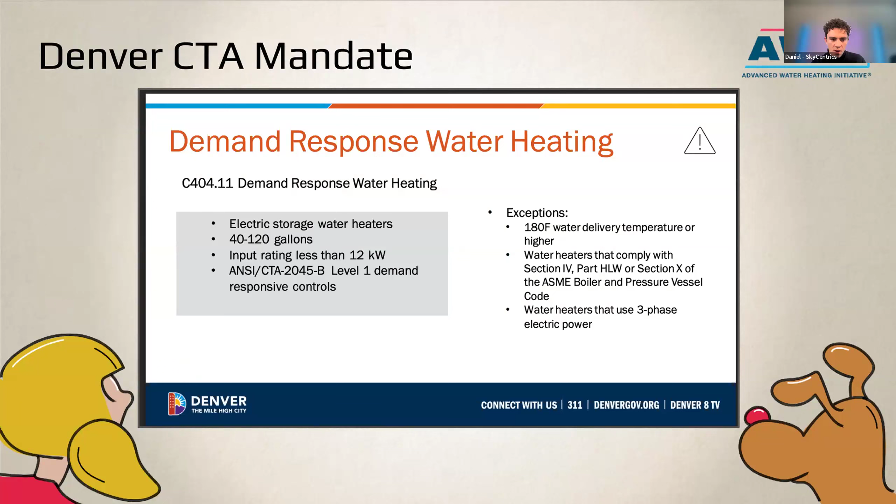California has Title 24 JA13. It's a little more complicated, and it does require the EcoPort socket, but not on every water heater sold in California. And then Colorado, the city of Denver, has started something. We have it in detail on this slide — if you are putting in water heating, I believe it's multifamily, it doesn't say multifamily here, so it says electric storage water heaters must be CTA 2045. Daniel, do you know if that was the whole any water heater in Denver or just sort of multifamily, or you're not sure? Unsure. Okay, great.

So why is the EcoPort CTA 2045 open socket so worthwhile? A couple of quick points: vendor neutrality avoids walled garden and vendor lock-in. The most important thing is that for stranded assets, for all of you who are utilities, it's going to be the least expensive way that if your vendor ever goes out of business with that white module that plugs into the water heater, you can just mail everybody a new module. We've seen even big companies like Google end-of-life certain products that just become bricks in the Internet of Things world. So I think that's one of the big reasons that the EcoPort socket has value.

We call it sort of competitive vendor access. And then also at the bottom, you see better optional connectivity paths. Most OEMs at best are going to put maybe Wi-Fi inside it on the residential side. On commercial, it gets a little more complicated, but having that socket, kind of a USB port for machines, allows utilities to say, 'I'd prefer cellular,' for example, which has shown itself to be a little bit more long-term connectivity guaranteed than Wi-Fi, because people change their passwords, change their router, change their provider, etc.

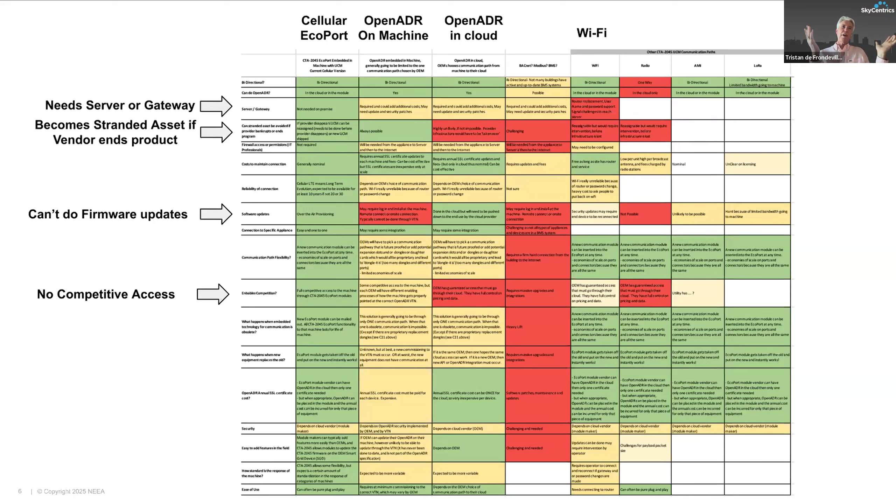With OpenADR in the cloud, the OEM — like some water heater manufacturers have an OpenADR cloud — they can still send firmware updates, but only however they chose to communicate between their water heater and their cloud. And if you have OpenADR in the cloud, it becomes a stranded asset. So the nice thing about a cellular EcoPort module is it's always there, and it could actually be redirected to a new vendor if the original vendor goes out of business — you don't even have to mail a new module.

I think you might have frozen up there, Tristan. Daniel, are you able to hear Tristan, or is he frozen up on your end too? Looks like he's frozen up on my end. Let's see if I'm able to take control of the presentation real quick.

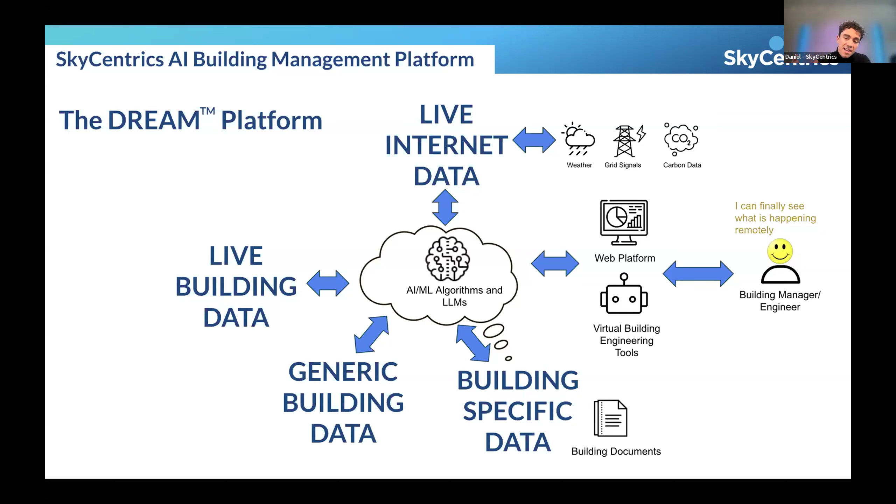And then you've got your live internet data, so that's what's going on outside the building. That could be weather, grid signals, or carbon data. It basically aggregates all of that using machine learning algorithms and provides it on the Dream web platform that the building manager, engineer, owner, or anyone else can access and see all in one place.

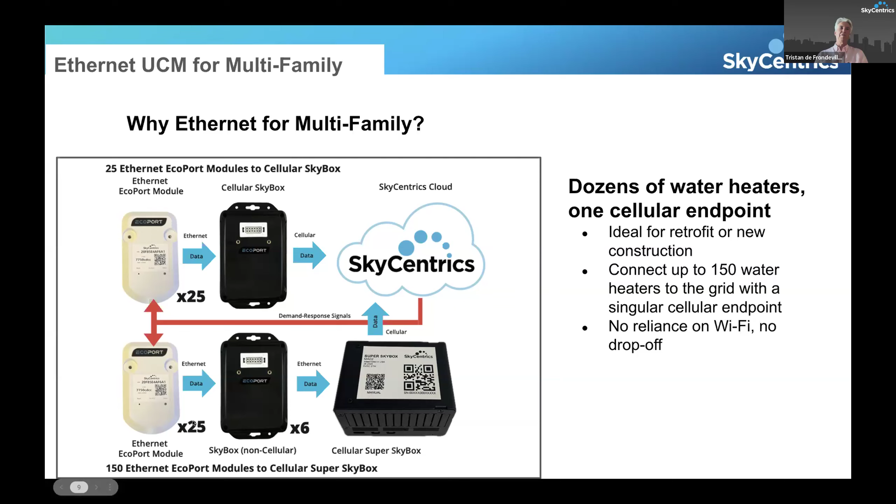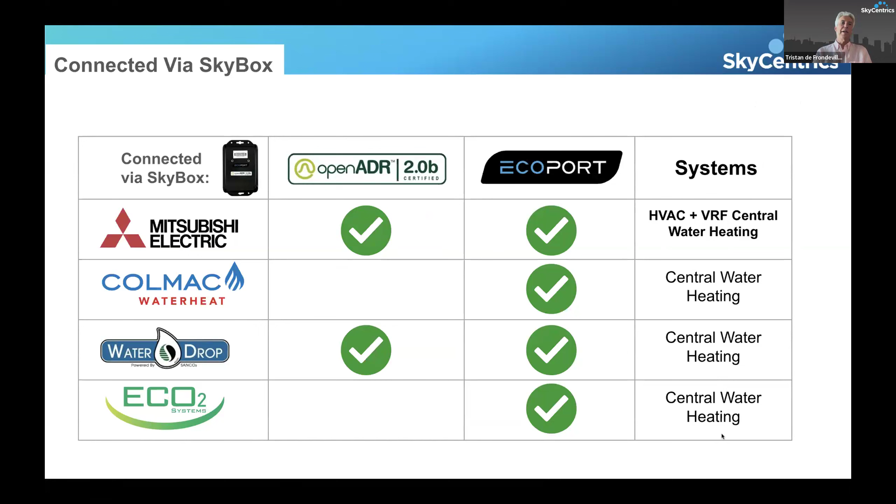So these are the people whose central system water heating are now EcoPort compliant and even OpenADR compliant. Mitsubishi has presented on a number of things about their QAHV central system water heating, which is exciting. You may have heard of the Bayview apartment buildings, but their VRF HVAC systems are also now going to be able to be grid enabled. So that's very exciting.

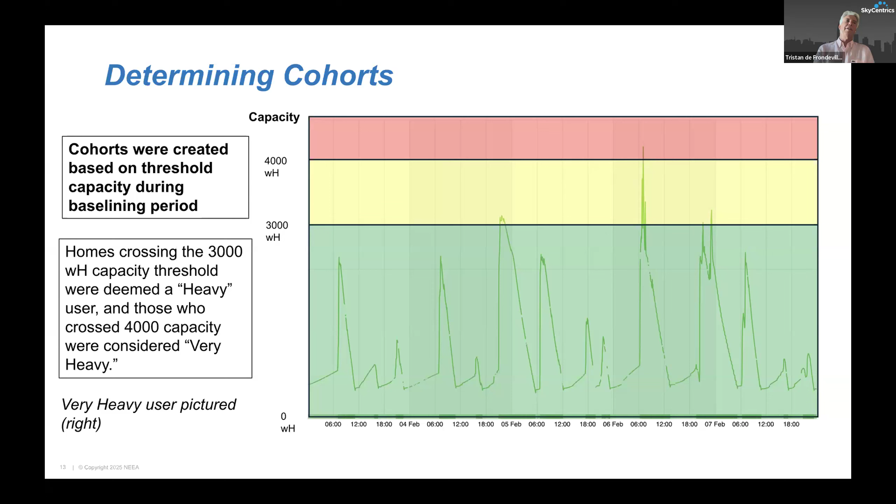So we determined that in, let's say, 100 water heaters, about 76% never get close to being a cold water event during their normal use. There are heavy users that get close a little bit sometimes, and then there are very heavy users that we have to be very careful with.

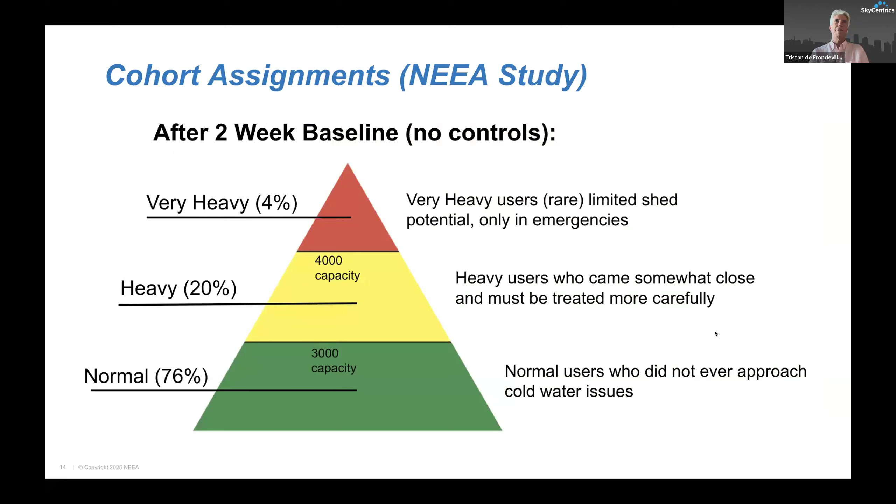So we already split those up into groups. Next. All right. So right now you can see the whole cohort being done. Sorry, next slide. But I think I got the idea across, and we're going to be a little bit late.

So one of the things that we can do besides sorting by hot water usage is time of day use. Geography: there's actually geolocation through cellular, and potentially you can put a chip right on it, obviously, that gets you 3 feet accuracy or 3 meters, but the cellular towers actually get you within a mile, so at least you know typically what territory it's in.

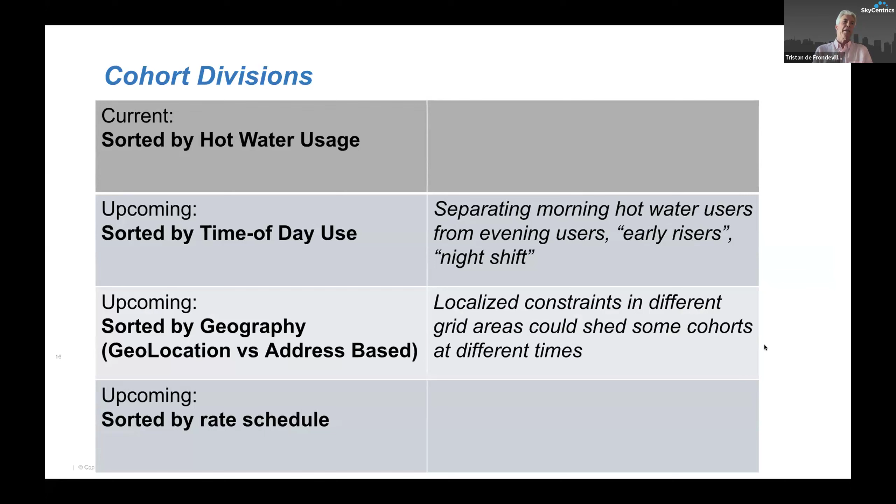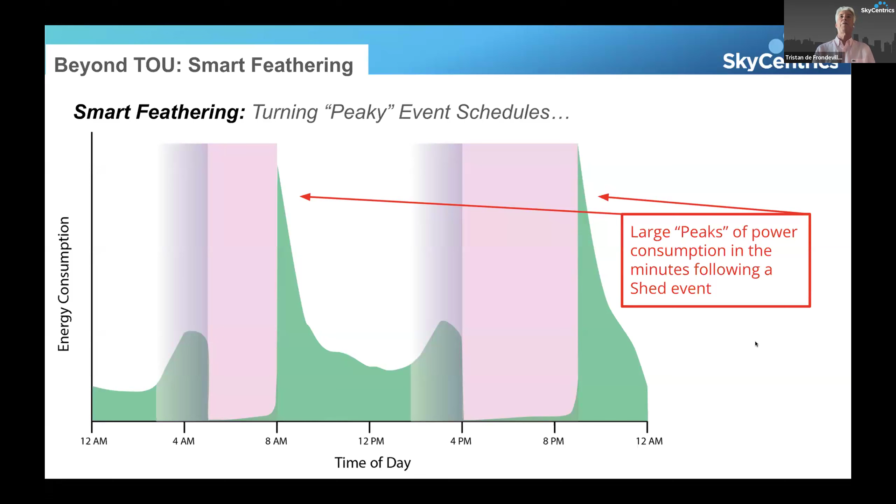Next slide, please. All right, so one of the things that we did with the end-use load flex is something called smart feathering. So smart feathering means that there's usually a large snapback because you've been withholding the water heaters from heating during a shed for 4 or 5 hours. So all of a sudden they all come on at exactly the same time. Not a big deal for a couple hundred water heaters, but you can imagine for 1,000,000 water heaters, that would be a big snapback on the grid. Next slide. So we basically reduce that and flatten it out.

How do we do that? Next slide. We basically group each device in the fleet by capacity of how far away they are from being fully heated. And we take basically the coldest ones first, and we heat those up first. We break the group. You can choose actually how many groups you make and how many minutes each group has, but the bottom line is it's smart feathering so that you don't have that snapback.

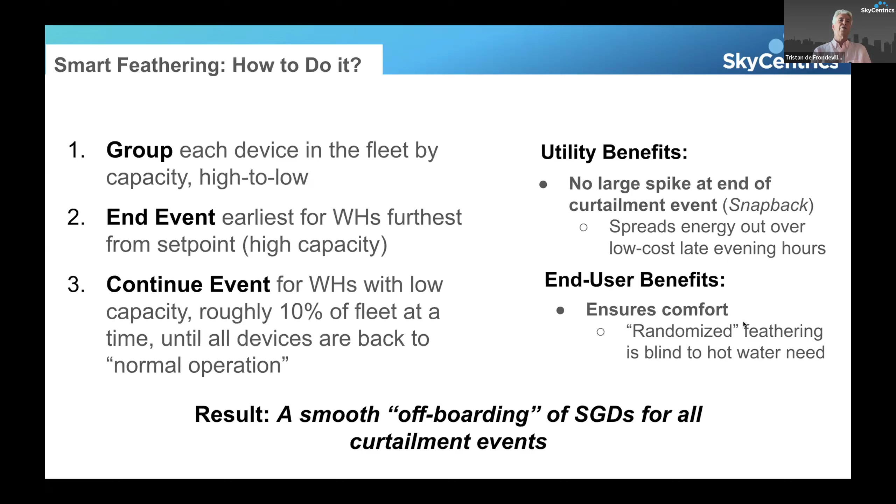Next slide, please. We also have something called day-ahead price shape. So if you've gone to our website, you've seen this. This is weekdays in August of the California grid. And it shows how that lake that we're trying to fill with the peak over on the right, it changes quite a bit. And then where do you start the ramp? When are you sort of supposed to do things?

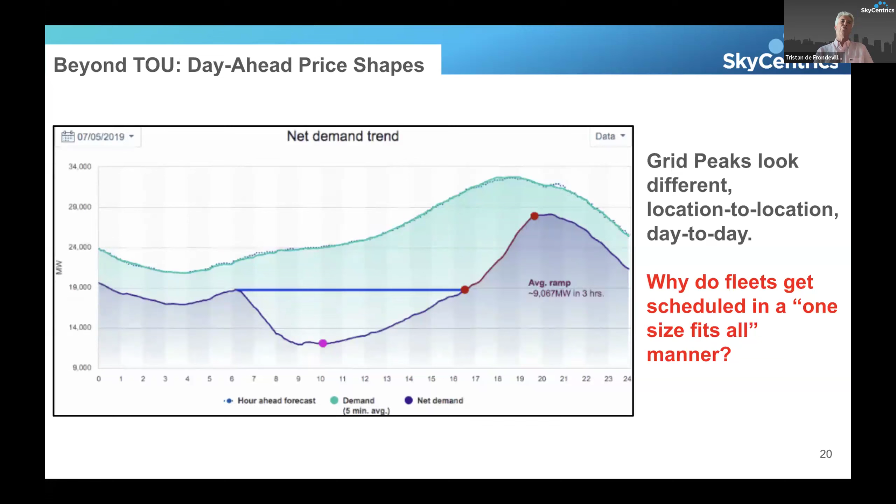So that's every day shifting, and it's our pitch for real-time prices as opposed to time of use. Because time of use, you can only change it every 6 months, let's say, at most 2 or 3 times a year. Next slide, please. So what we can do is look at the real-time price shapes that are typically published 24 hours ahead.

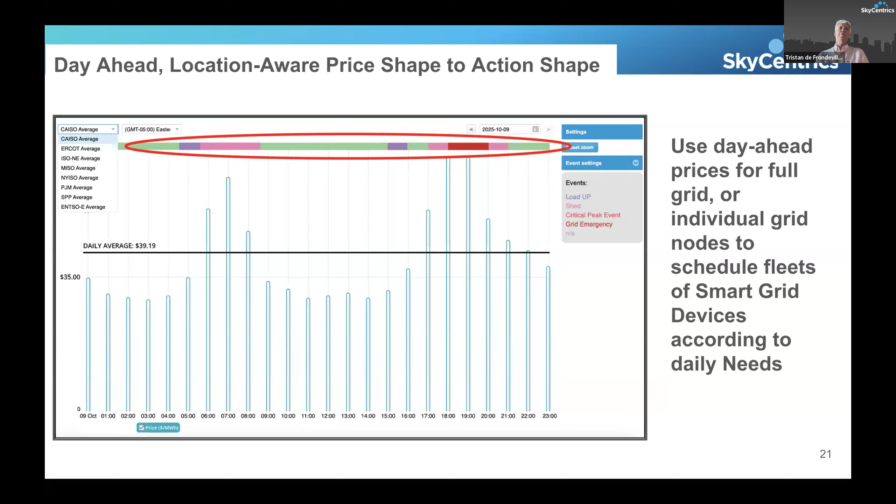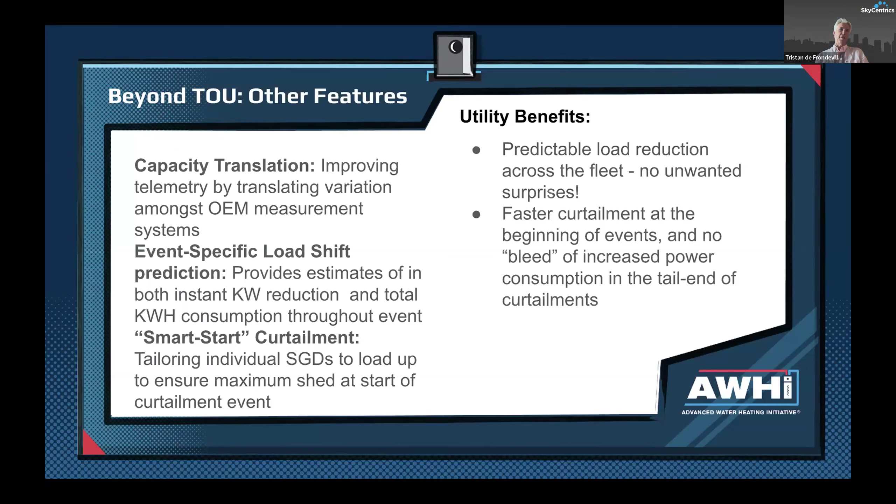Next slide. All right, so these are some features, not a lot of detail here, but we noticed that some OEMs have different representations of their capacities, so sometimes we have to adjust those so that they make more sense. We're also doing load shift prediction. This estimates your instant kilowatt reduction and your total kilowatt hour reduction through the event. So people can actually use our platform to predict the behaviors of the events, potentially bidding into markets. And then I'm going to go to the next slide.

But no matter what, what's nice is that in Washington and Oregon, every new electric water heater has to have an EcoPort socket. So we're finally getting data on how an electric resistance only tank can benefit the grid by flexing. Next slide.

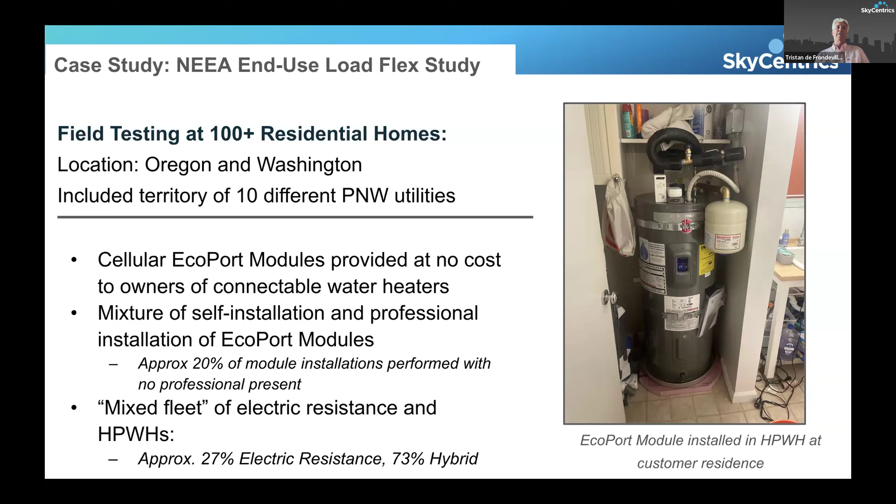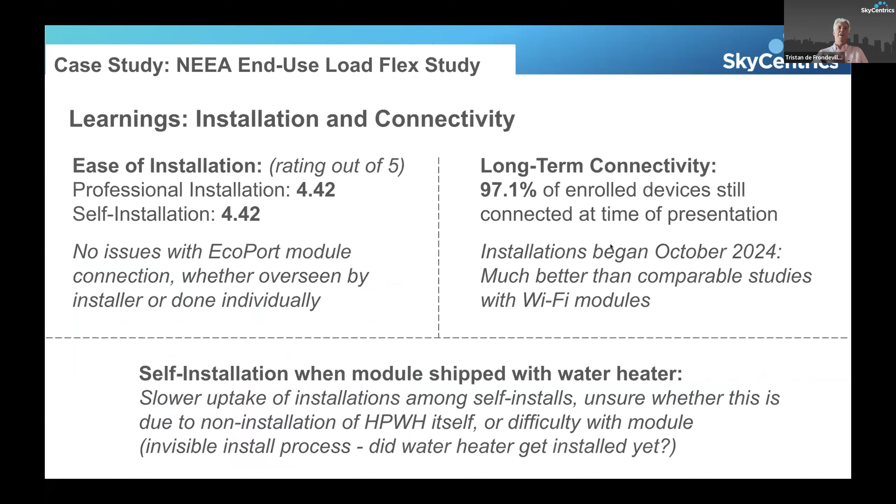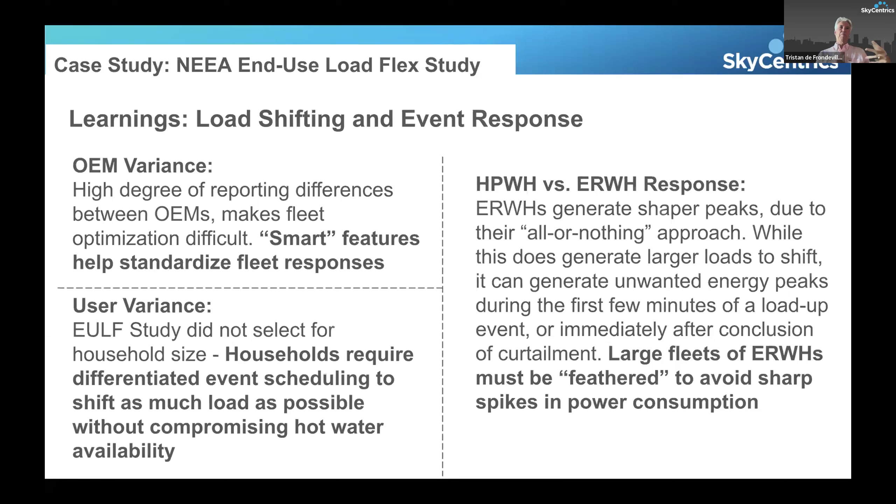I talked about the OEM Variance, so we've worked on the storage capacity numbers to normalize them. I talked about grouping by household, and I'm going to go to the next slide. Thanks. So here's, again, I really want to focus on commercial, so that was residential. So this is PAE Engineering headquarters. It's called the Living Building. 4,000 people tour this building every year. And it's one of the most advanced examples of regenerative design.

And yet, after they built this building and they had all of these cool things like solar panels you can see on the roof and a microgrid controller and a battery energy storage system and a building management system, what was missing was the data. Next slide. So believe it or not, their biggest use case was take that solar and use as much of it internally as possible. So they wanted to turn on these water heaters, and they had asked that everything be connectable. And these water heaters had zero way, no Modbus, no BACnet, no EcoPort sockets.

So the manufacturer's actually sending us new boards that have the EcoPort sockets because thanks to AHRI, commercial building specifications like 1380 and 1390 are coming out and encouraging water heater manufacturers to put CTA 2045 sockets on commercial equipment. Mitsubishi, as I said, has already done it, so we're excited to be able to do that. Next slide, please.

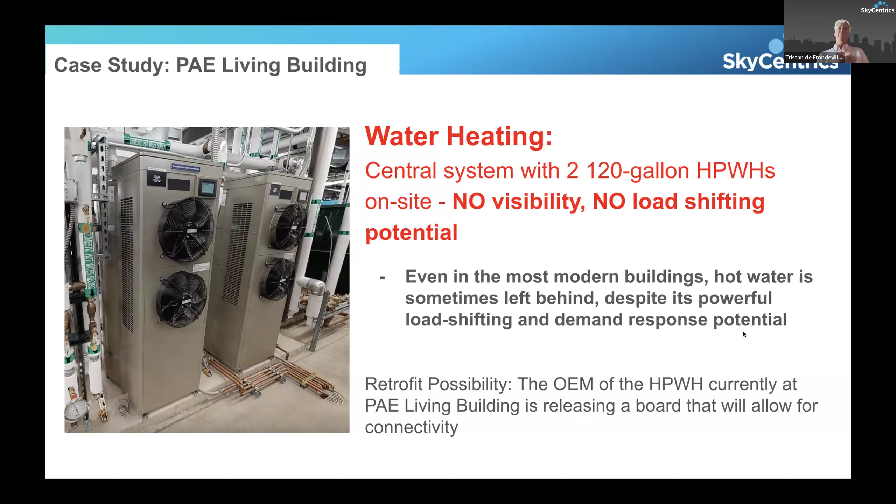Here's a situation where Water Drop Systems is doing this great skidded solution for commercial buildings. But again, they were completely blind once we left the project site, which is often the case. And these systems, commercial systems with swing tanks, they're more complicated. And if the heat pumps go a little bit out of whack, the swing tank takes over. It's providing hot water, but it's using massively more electricity.

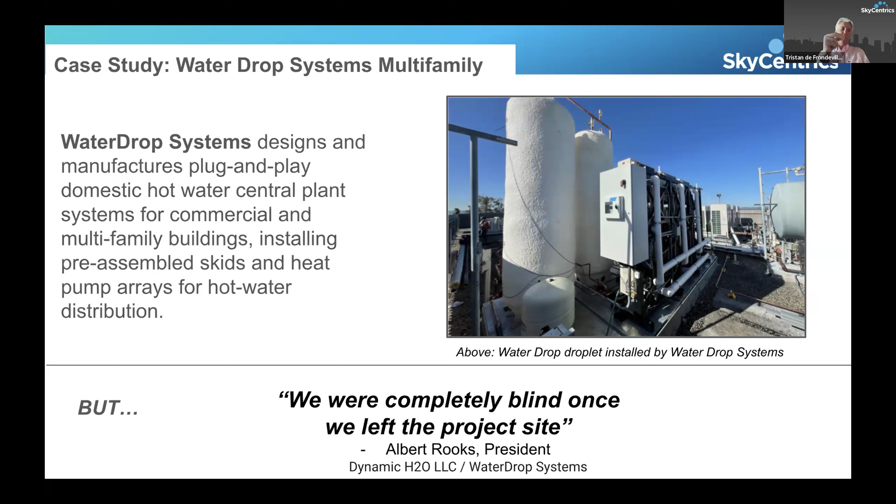You're not getting that heat pump miracle benefit of the coefficient of performance at 400%, or 4, rather than down in the electric resistance. So it's really important for these heat pump systems to be monitored in real time so that they can be kept alive. Ecotope, as you know, has EcoDash, and we're working with them to try and help all of that analytics come in to cellular connectivity. Next slide, please.

So here is an example of what they're providing through the Skybox, right? You're getting tank temperature, load shift controls, price shapes, and our dream platform is there, demand response energy and asset management. And believe it or not, Water Drop is working with a Canadian utility to do a whole bunch of load shifting on these big water heaters. So commercial load shifting is going to be here, especially through Water Drop. It's already been happening with the QAHV. It's happening with a few other manufacturing partners, but this is going to be exciting to do a whole bunch of them in Canada.

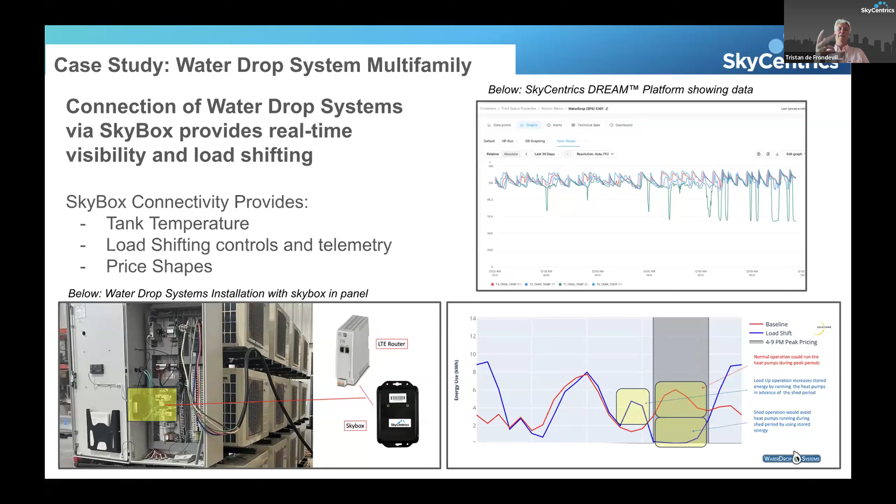Next slide, please. All right, and finally, the Cal Flex Hub did some testing on these multifamily sites in San Francisco that also had QAHVs. Next slide. So what we noticed here is that there was no access to whole building metering, and all of the energy shifting that they were doing was based only on time of use. So Daniel, can you speak a little to this slide?

Sure. Yeah. So essentially, the two limitations that we saw were that they were using the CalFlex Hub estimated dynamic pricing for all their pricing estimates, their savings estimates, etc. But we saw that that didn't actually reflect what the building owner was paying, and they were seeing actually greater electric bills because their electricity tariff was different than that CalFlex Hub assumed pricing. So essentially, once those studies were finished, they were left without a schedule. So SkyCentrics is essentially taking up the mantle of this and working with the building owner to optimize for their schedule rather than the CalFlex Hub assumed pricing schedule.

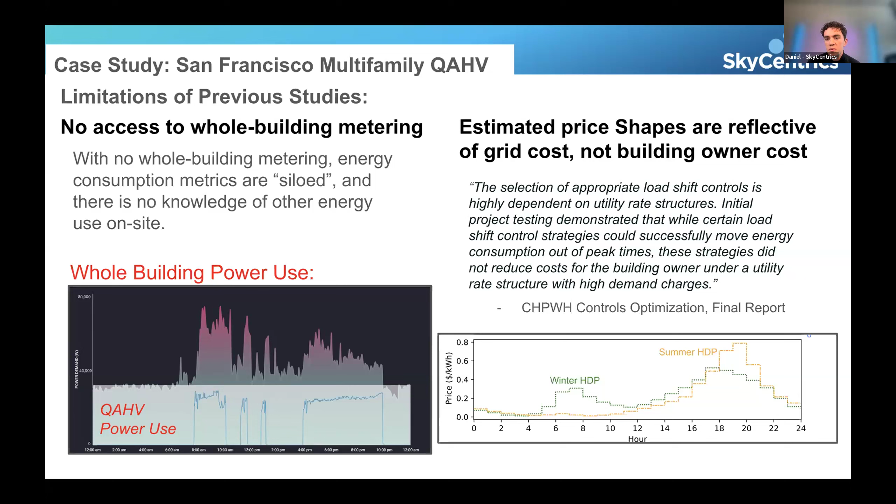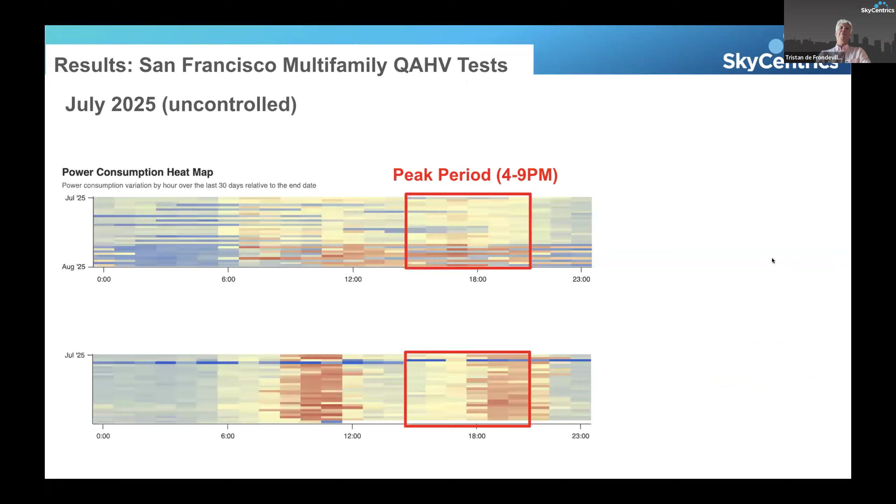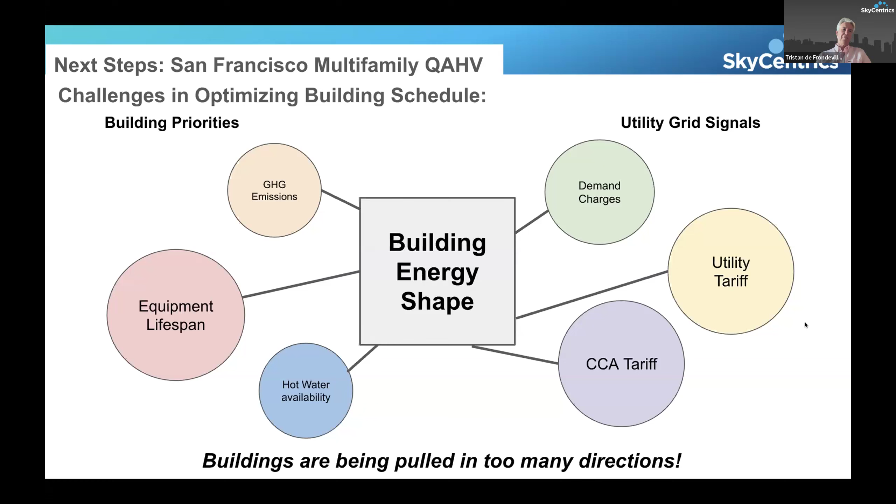This is just exciting of what's coming because buildings are being pulled in every direction. Next slide. So for commercial buildings, there's really exciting stuff going on with the Linux Foundation, the Coalition for Smarter Buildings, and all these open standards that are being brought to commercial buildings so that AI can get involved to manage all these complexities automatically. Next slide. And we're going to go really quickly through some benefits for the residential and people inside the building.

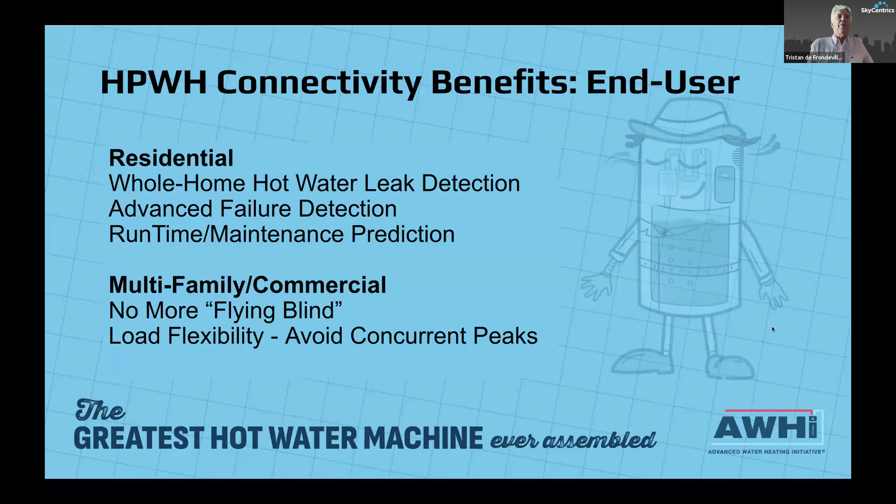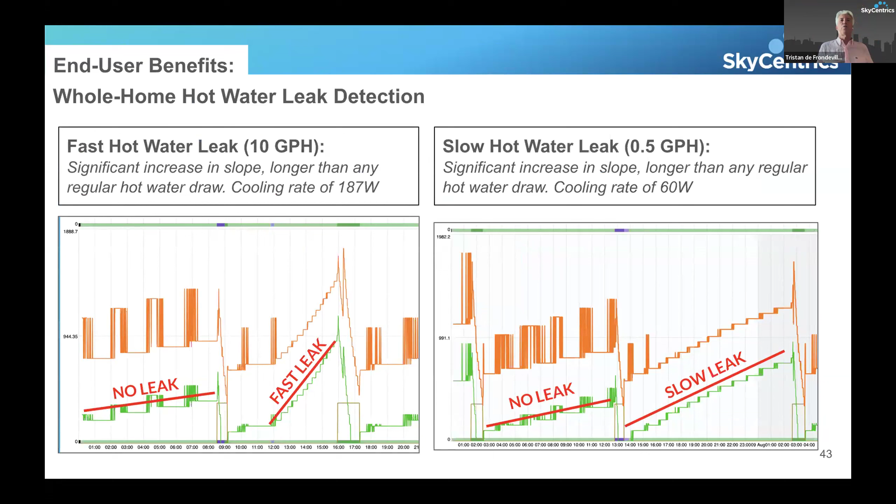So go ahead, Daniel. It turns out that we can do whole home leak detection because of the slope of the cooling. Next slide. So here you can see there was no leak versus a fast leak and a slow leak. So just from that midnight to 4 a.m. when there shouldn't be any behavior and just cooling, we can see the leak speed or the cooling speed. Next slide. And then we even detected compressor failure. So that's sort of fault detection on these systems because they just behave very differently. And I'm going to stop there to give my next colleague more time.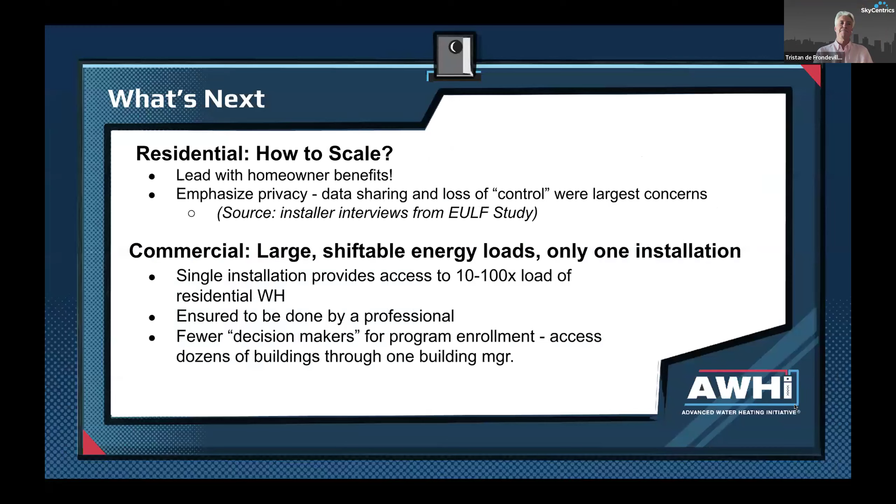Thanks. Thanks a ton, y'all. That was great. And so cool to see the multifamily focus too, because as Tristan and Daniel mentioned, right, it's a big power output and input from multifamily systems. And then demand charges can be 30 to 70% of a building's cost. So being able to shift those away is great for saving money and, of course, emissions too. So thanks again, y'all. And there's some Q&A, but we'll hit those after Karen goes.

So Karen, if you want to share your screen. Hello. All right. Is that working? It is indeed. Looks great. All right. So thank you all very much.

I am with the University of Central Florida Solar Energy Center, or FSEC for short. And we did a smart water heater project. This was residential. We conducted laboratory and field experiments in the high impact region of Florida to demonstrate the viability of grid connected heat pump water heaters compared to electric resistance water heaters. This was a collaboration between us and the Pacific Northwest National Lab, and this was funded by the U.S. Department of Energy. And I want to acknowledge all the researchers that were involved in this work that I'll be presenting.

We conducted this work from 2019 to 2022 in Central Florida using the modular communications interface with CTA 2045. And I'll share results from both the field and the lab component of the project. Our lab involved 5 tanks, 3 different manufacturers, 4 heat pump water heaters, including one that was a prototype that allowed the CTA 2045B protocols to be sent, and I'll tell you more about that later. And there was 1 electric resistance tank in there in our lab. And we had 51 single-family homes with heat pump water heaters enrolled in the field study. And for both of these, we compared a variety of communication strategies.

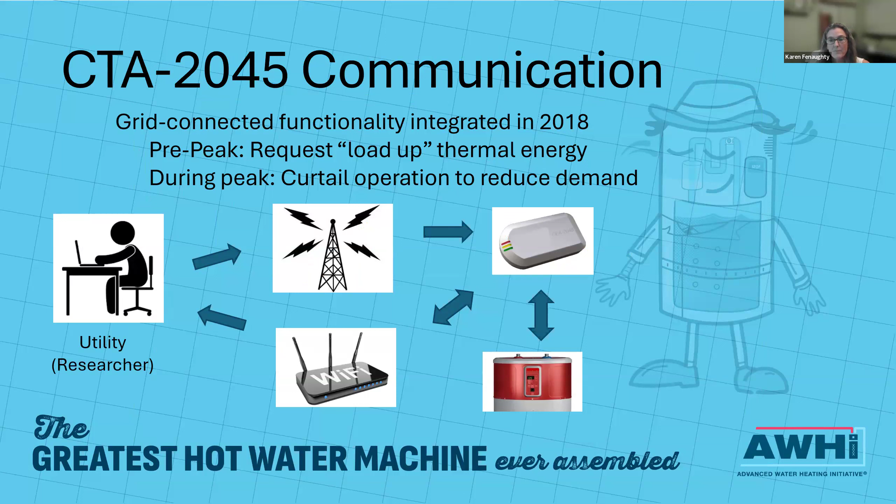The CTA 2045 protocol messages were sent in this method for this work that we had done. We researchers sent messages as a utility might, and these were sent through FM broadcast signals to the connected portal that was attached to the water heater, and then the data were sent back through the portal via Wi-Fi.

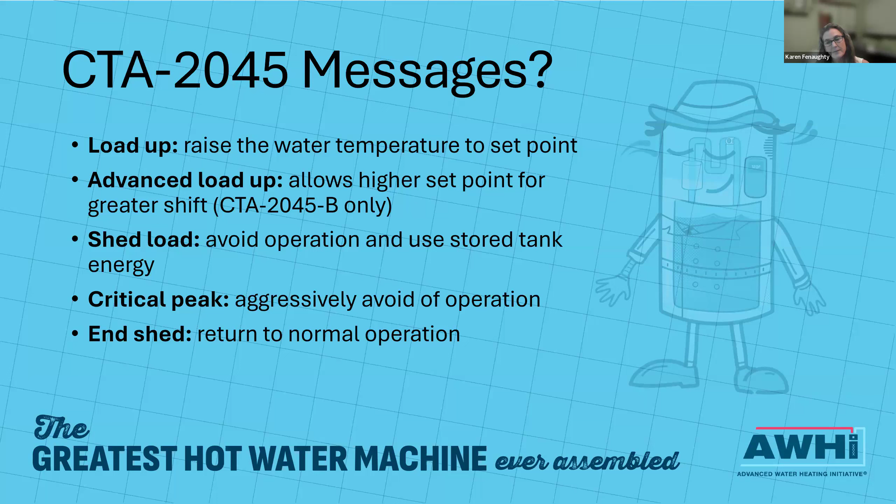For our work, we used these messages. This included load up, which is to tell the unit to operate now and raise the temperature of the water to set point. Advanced load up, allowing the tank to come to a higher temperature to provide greater shift capability, and this is only available for the CTA 2045B capable units. Shed load, to tell the tank to avoid operation if it can, to use the stored tank energy to a point. And critical peak, which is a more aggressive avoidance of operation. And then we would cap it off with an end shed to get the tank back to normal operation.

We conducted over 200 tests, and they included a variety of morning and evening load up and curtailment lengths. The longer load ups were intended to fully heat the water in the tank, and the curtailment hours reflected the times when system-wide electric demand reductions were of highest value.

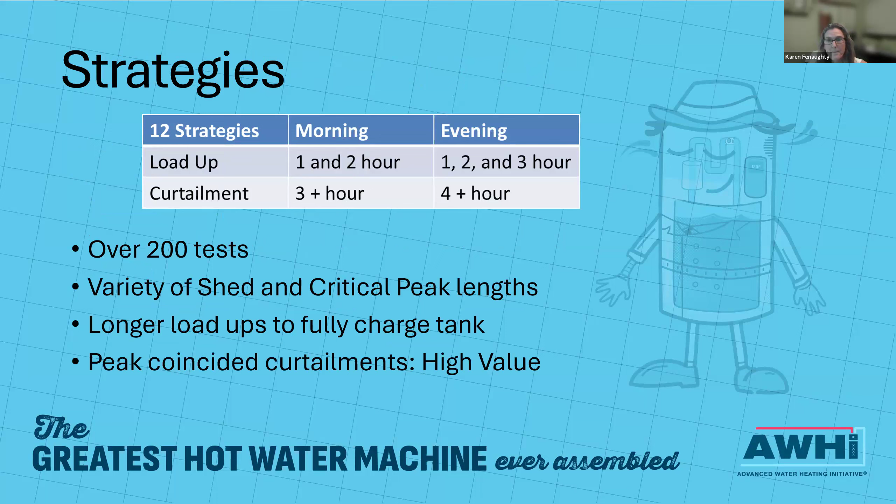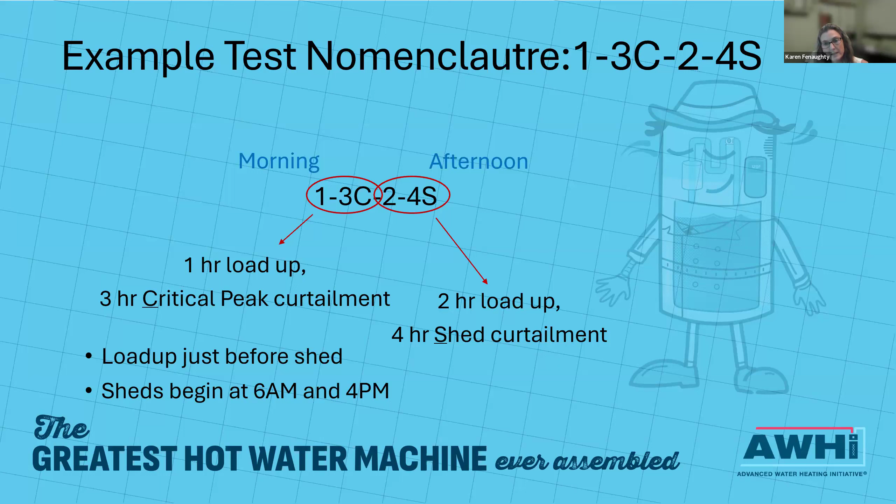Here I just want to show you the test structure nomenclature that we used to familiarize you with what you'll see on the coming slides. In my example here, this is a 1 hour load up, a 3 hour curtailment, but a critical peak curtailment. That's what the C is for. And then in the afternoon, we had a 2 hour load up and a 4 hour S for shed curtailment. Each test structure was sent for a period of 1 or 2 weeks. And then in between, we would also collect 1 or 2 weeks of baseline periodically, in which we'd send no communications. So we would have that throughout the year.

The lab tests were conducted in FSEC's hot water system laboratory. And this table provides the communications type, the tank capacity, and the UEF of the 5 units that we tested. We applied different CTA 2045 control schemes under 3 different water draw profiles. And these draw profiles were established by PNNL and NEEA.

One was a 47 gallon per day, which was meant to mimic a small household and or summertime draw, a 57 gallon per day for a medium household or shoulder season, and then a 69 gallon per day draw designed for a larger household or for colder weather. All of the tested systems were simultaneously subjected to the same water draws, and we monitored electrical power, the tank's inlet and outlet water temperatures, as well as room temperature and outdoor temperature.

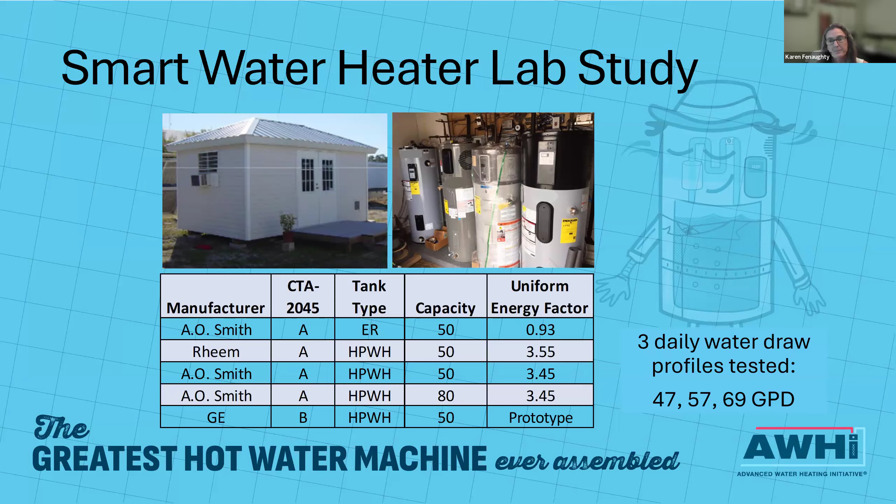Here we have demand for a 50-gallon heat pump water heater under the 47-gallon per day draw with a 2-hour load up, 3-hour critical peak, 2-hour afternoon load up with a 4-hour critical peak curtailment test for days where the average temperature was over 65 degrees. The red dotted line is the baseline. The purple is the demand during the testing, and the medium blue spikes are the water draws. And then I've also shaded the load up and shed in the morning and the afternoon.

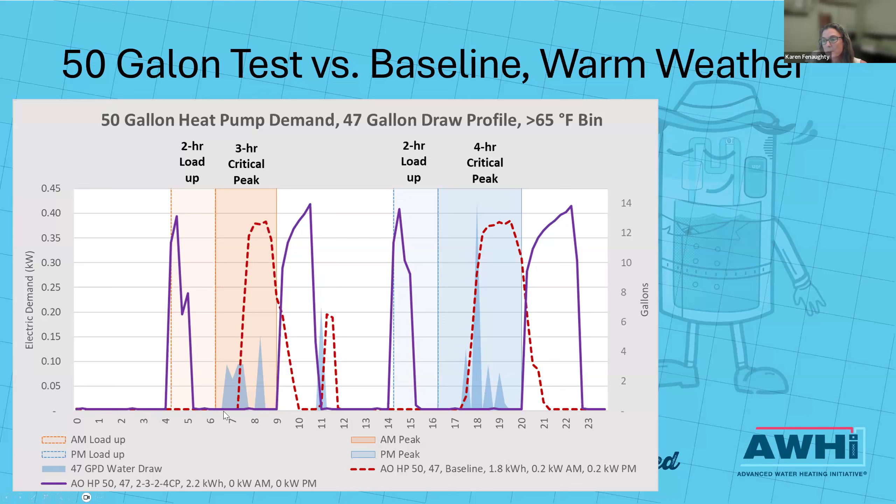Daily energy use during load shifting is up slightly in this example. It was 1.8 in baseline to 2.2 kilowatt hours, although a time of use rate structure might help obscure this to a customer and they may not see any cost difference at all. Morning and evening peak demand were completely curtailed, as you can see, down from 0.2 kilowatts, and it's completely flat on both of these, morning and afternoon.

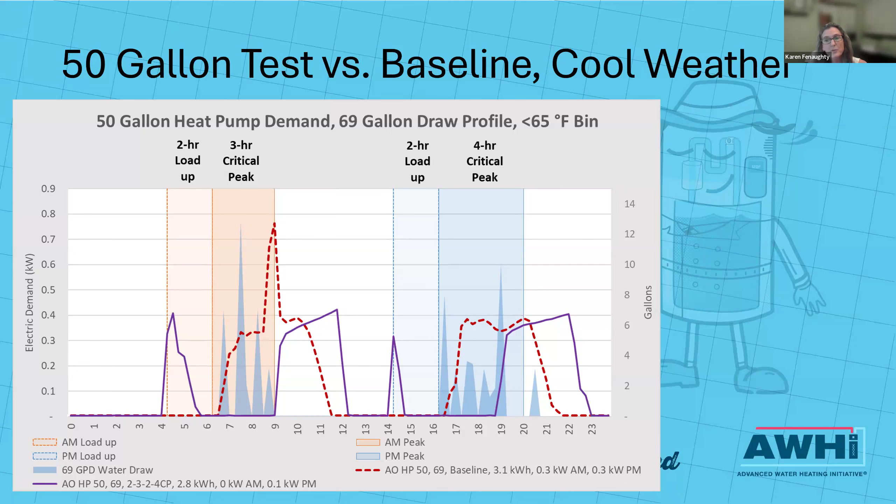It does beg the question, was comfort jeopardized to get through the morning peak? And we did take the temperatures, as I said. The minimum outlet temperature measured during the baseline for this specific bin was 117 degrees Fahrenheit. The minimum was 115 during the curtailment. So the tank temperature was allowed to drop a bit, but it didn't drop by very much.

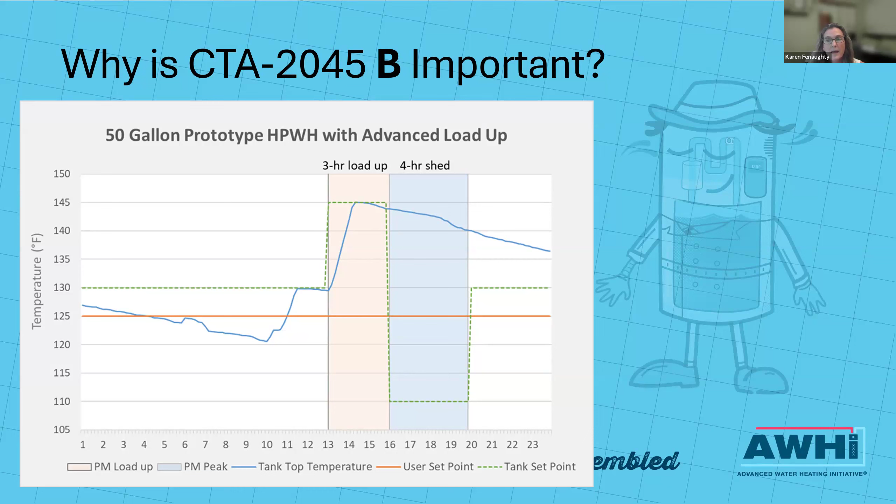This plot is an example of a CTA 2045B unit's advanced load up capability. This unit we tested was a prototype, and it was able to receive this advanced load up message, heating water above the set point. In this plot, we have a 3-hour afternoon advanced load up from 1 to 4 p.m. We see that after about 90 minutes of advanced load up, the tank temperature in blue reached 145 degrees, and this was the temperature that we allowed for testing. The set point for delivery was a temperature of 125, and that is in orange, and that was achieved via the thermostatic mixing valve.

Here we see the same cool days plot as before, but I've added in the average demand of the CTA 2045B prototype unit in green. One caveat here is that the load up instruction for the prototype unit was only 1 hour versus 2 hours for the A unit. And still, with only 1 hour load up, the prototype storing higher temperatures completely curtailed the use during the peak periods, even on colder days and even with the higher draw profile.

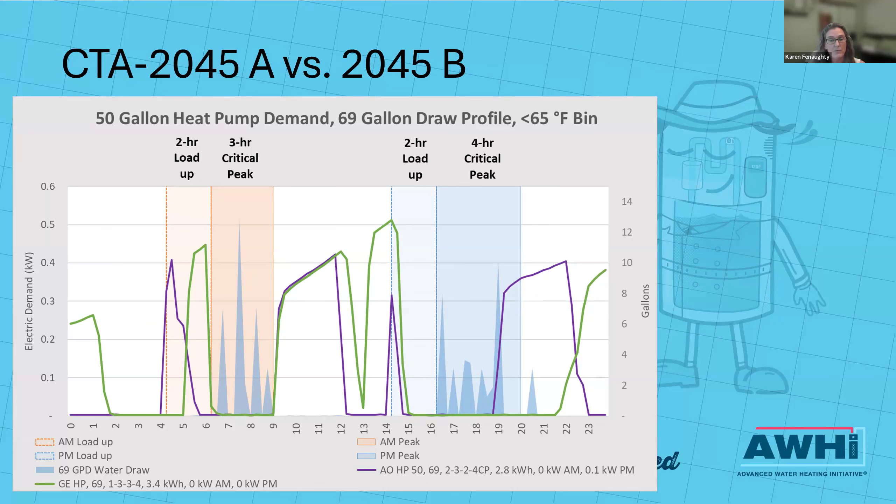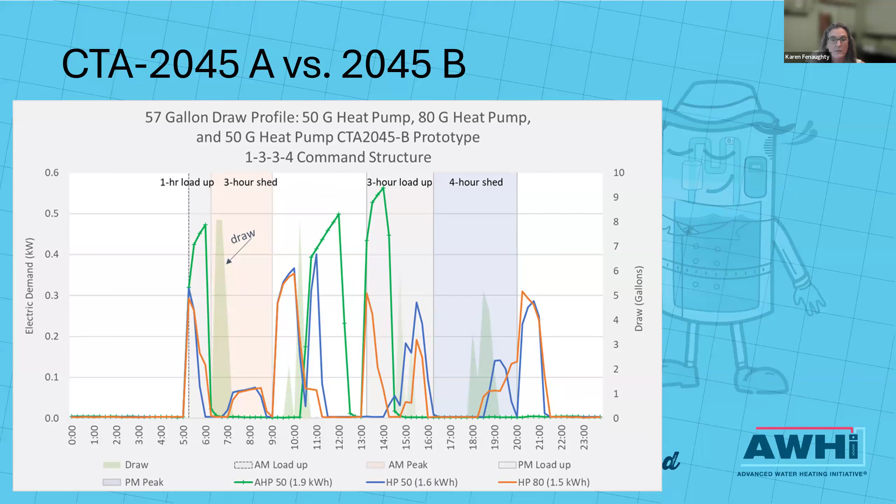Here's another example of the CTA 2045B results in comparison to a 50-gallon and an 80-gallon CTA 2045A unit. This is under a 1-hour load up, 3-hour shed, 3-hour load up, 4-hour shed test with a 57-gallon profile. Again, demonstrating the superior ability of the CTA 2045B unit to completely curtail use during the peak windows. These examples are indicative of what we saw. We saw that advanced load up does a really good job at curtailing.

Here's a summary of some of the lab test results. There's a blizzard of numbers here, but what I want to highlight is what I've identified in red. Each set of 3 columns are results for a particular unit. And the red shows the morning and the afternoon curtailments. These are all shed curtailments and all during warmer weather. All units showed a great ability to curtail peak demand during the warm weather.

The one exception is that very bottom test, which was a 69-gallon draw profile with a 0-hour morning load up. So not taking advantage of the load up and an extended curtailment period. So we kind of threw everything at these units just to see what we would find. So we definitely challenged the units with this, but still we saw great ability to curtail. All the strategies showed a great ability to curtail during the 3 and 4 hour peak windows with small or no energy penalty at all.

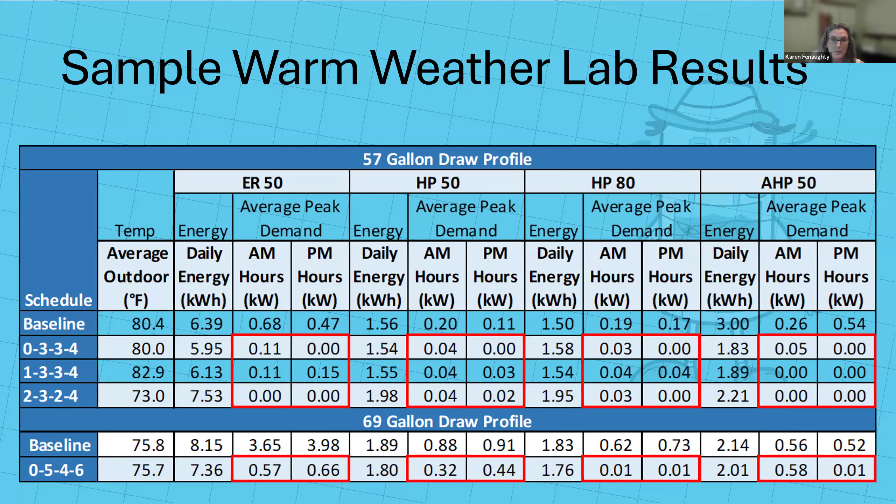Here are the best results for the tests for both the cool and the warm weather. And we say best in terms of greatest demand curtailment first. And in many cases, it was complete or nearly complete. And so from there, we'd also look at the least amount of energy at the same time. Summer results are for days averaging temperatures of 80 degrees, and they're under the 57-gallon per day draw.

The winter results are for days where the average temperature was less than 65 degrees, and these were under the 69-gallon per day draw. A 2-hour load up and a 3 or 4 hour curtailment was often found to be the best strategy, regardless of the temperature profile. And even under the winter test, the 80-gallon unit and the prototype that would allow for the advanced load up were very good at handling curtailment nearly perfectly every time.

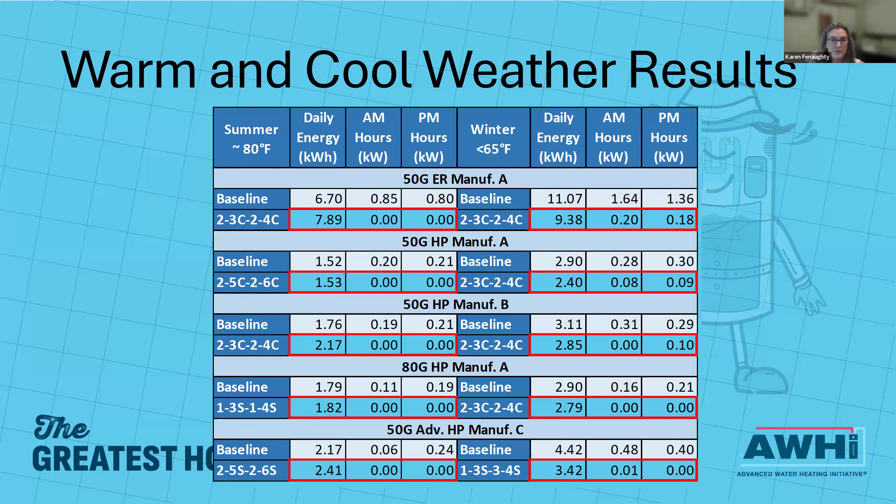Summarizing the lab results, the tests indicate that heat pump water heaters saved 53 to 78% of water heating compared to electric resistance. The lower range here was from the prototype unit, which did have some issues heating when it wasn't called for. The units that are out on the market were at the higher end of this energy savings.

All the units demonstrated a great ability to curtail demand during a 4-hour evening peak and nearly as well during a 3-hour morning peak. The grid-connected heat pump units reduced peak demand typically between 0.2 and 0.7 kilowatts. The demand reduction depended greatly on the protocol, the tank volume, the control scheme that we sent, the peak period, whether it was morning or afternoon, and the draw profile that we used.

The prototype unit with the advanced load-up capability had the strongest ability to shed the load consistently. The delivered temperatures for all the production units were nearly always above 115 degrees. The few lower temperatures that we did find were in periods where we had zeroed out the load up and we had longer curtailment periods beyond 4 hours.

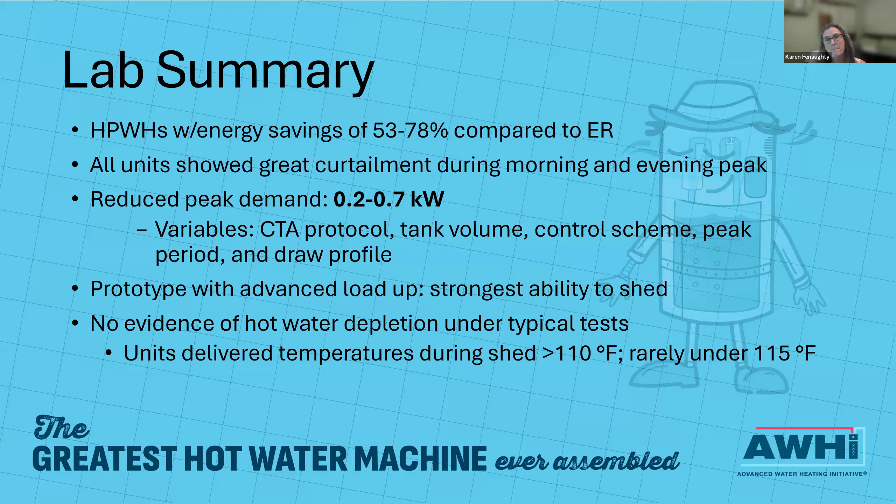Now I'll move on to the field study. Participants received an installed communications adapter with a module and connected to their Wi-Fi. During the 2-year project, the participants allowed us to send signals to scale back their water heating during peak times and increase it to load up. Participants always maintained the ability to opt out, however.

The majority of the 51 homes had 50-gallon tanks. There were typically 2 to 4 people in the homes. Nearly all of these were installed in unconditioned space, typically the garage. Participants completed 3 short surveys throughout the study so that we could track home characteristics, occupancy changes, water outages, tank faults, and replacements.

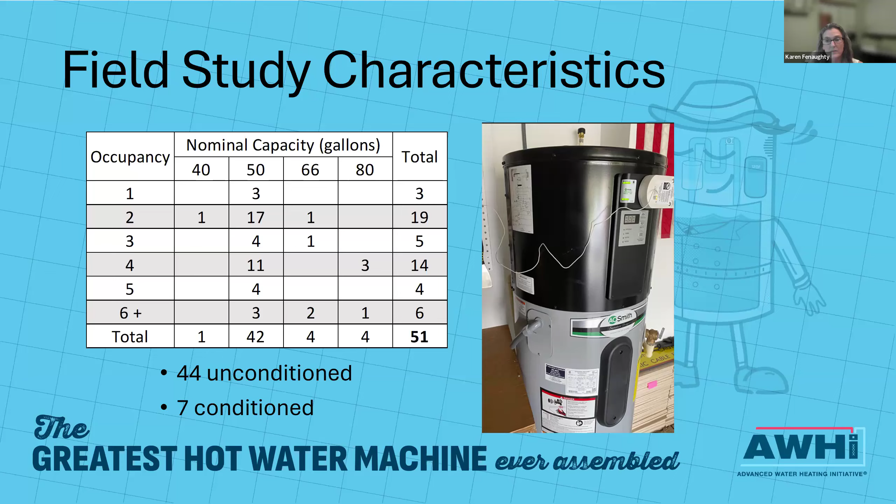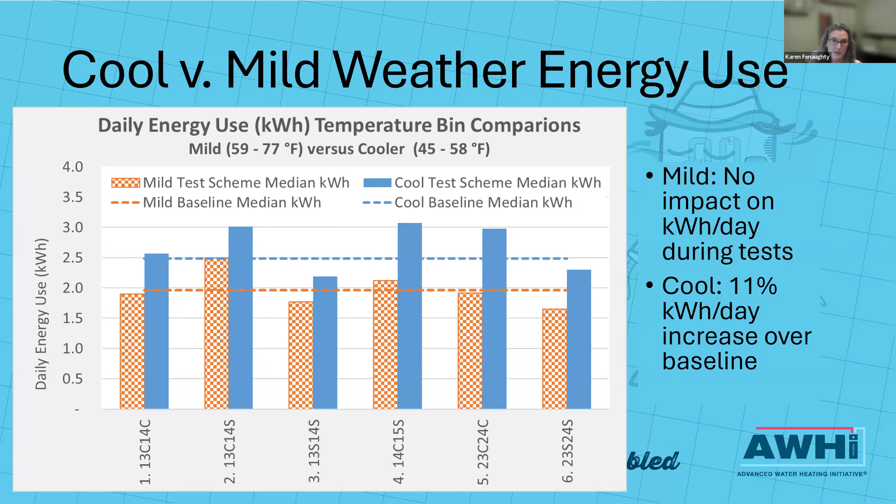Here are demand results for the mild temperature only. During mild weather, we had a good number of tests, so we were able to compare different strategies. This plot shows 12 different tests that we compared. It includes load up and curtailment demand. Load up is in red, with candy cane pattern in the morning and polka dot in the afternoon, and the curtailment is all in green. The curtailment results presented are normalized to the hours so that we can compare tests of different curtailment lengths, and the demand changes are shown as deltas from a zero baseline.

I have some backup slides I won't get to here, but they help make the following points: demand during morning load up, the red candy cane, for the 1-hour tests was consistently about twice that of the 2-hour test, indicating that the second hour of load up was not as important as the first. However, the 2-hour morning load up test tended to produce larger curtailment period reductions, showing there was benefit to having that second hour of load up. The afternoon load up, the red polka dot, has the same trend we saw in the morning, with greater average demand and shorter load up lengths. But this trend in the afternoon was less defined than in the morning.

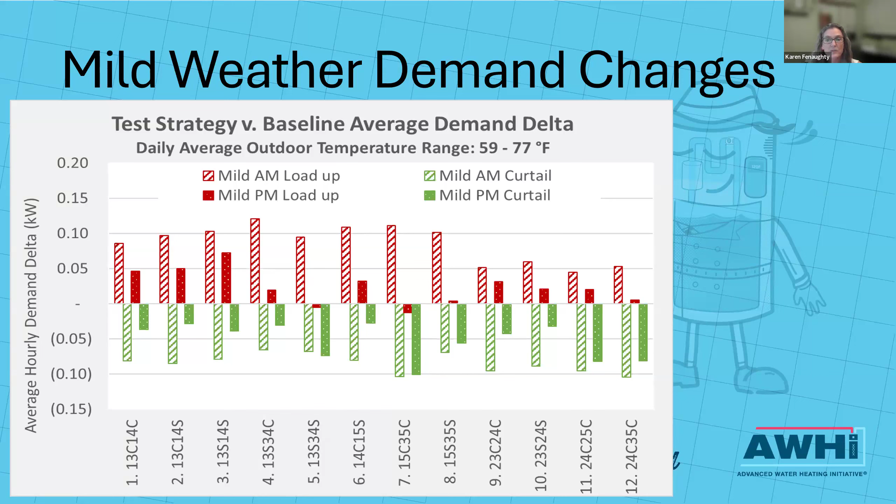Also, there were indications that the critical peak strategy was slightly greater at reducing the load than the shed strategy. In the cases where you see the arrows, the structure is unchanged except between shed and critical peak.

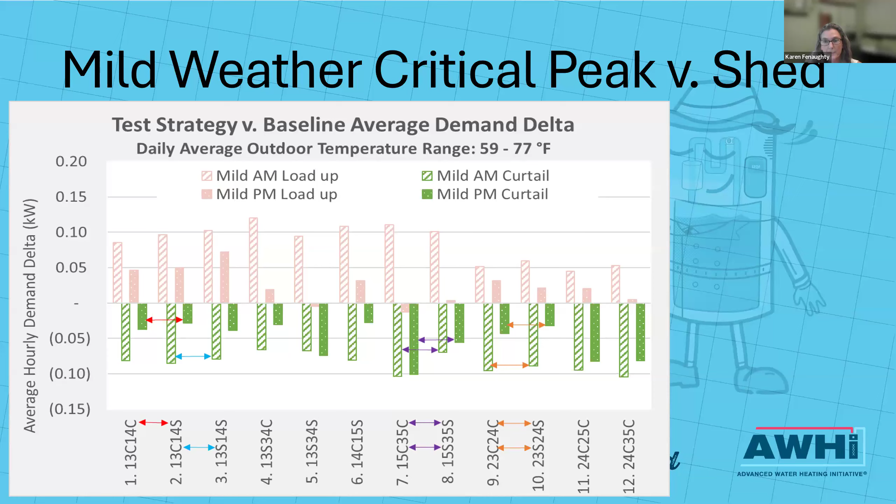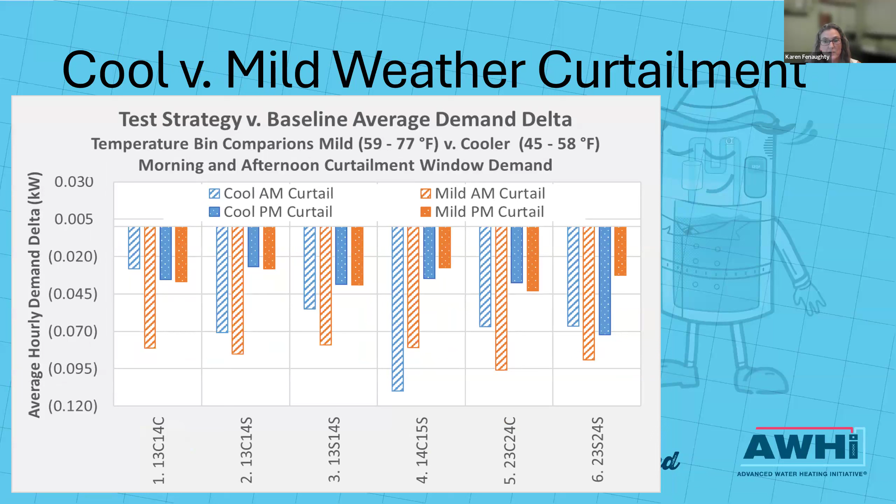Now going back to the mild and cold comparison, this time looking at demand. Even in colder weather, the demand during curtailment testing was consistently lower than baseline. However, morning curtailment tended to be greater during warmer weather than cooler weather, and compared to afternoon curtailment was lower for both temperature bands. Generally, afternoon curtailment was similar regardless of weather.

I have summaries here for each, but I am out of time, so I will just go to my final slide and say that load control for heat pump water heaters can generate good peak load reduction, greater in the morning than the afternoon, both in warm and cool weather in Florida. Morning reductions were greater than afternoon, and morning reductions were more predictable than afternoon. Multi-hour is preferable to a single hour load up.

We found no energy penalty during mild weather and a slight energy penalty during colder days, which is probably an indication of how the load control strategies altered use during cold days, where we saw an occasional recovery with electric resistance with those heat pump tanks. The CTA-2045 B advanced load up capability showed especially good strength in shifting the load.

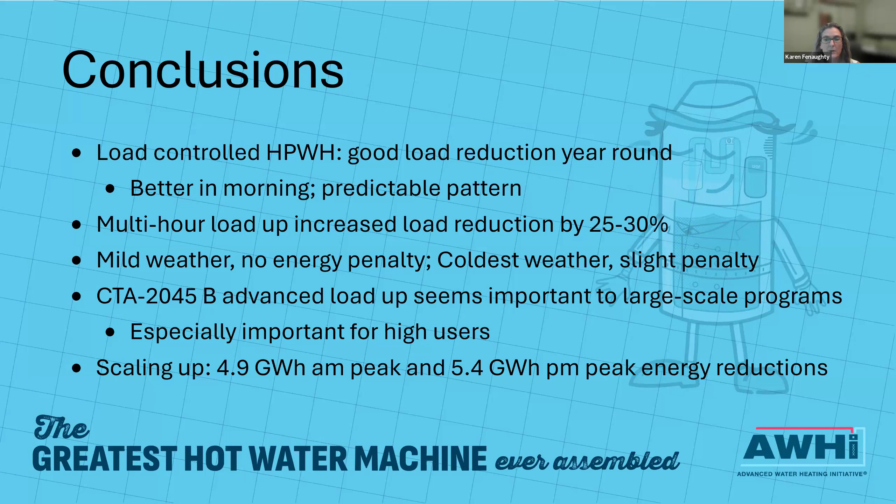Scaling up for the 3 million Florida homes that are candidates for a straightforward heat pump water heater replacement in single family houses, and enrolling them in load shifting programs, we estimate 4.9 gigawatt hour morning peak and 5.4 gigawatt hour evening peak energy reduction potential. And that is it.

Thanks a million, Karen. Thank you. Super great visuals, loved all the depth you went into various control strategies.

Will you tell folks where they can find your full paper, especially for the lab study? Is it on the FSEC site? Yes, yeah, I'll do that. I'll put that in the chat.

Folks, it's one of my favorite resources out there for load shifting studies, really great stuff, so definitely encourage you to check that out. It goes through all the different number of hours of load up and advanced load up, and the number of shed hours and all the different configurations, so definitely a good resource there.

A couple of questions, starting with one for Tristan. There was a question about cell costs and who pays for them, because I know you're doing a lot of cellular modules to make sure that connectivity stays high.